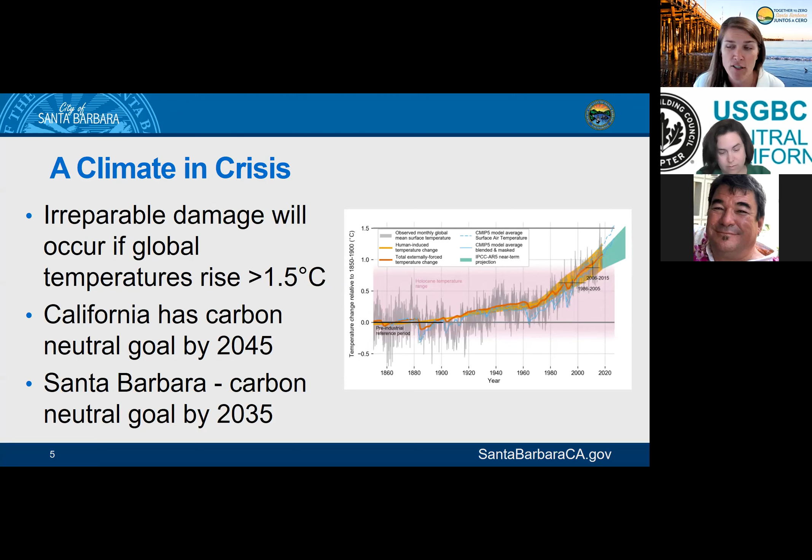As everyone on this call is likely aware, we have significant climate change happening. And in California, we have a carbon neutrality goal by 2045, and our council decided that was not fast enough and they wanted to go even faster. So they've set their goal by 2035. We're already seeing local climate change impacts in Santa Barbara. We have our increased fire season, prolonged droughts, which we're entering into another one now.

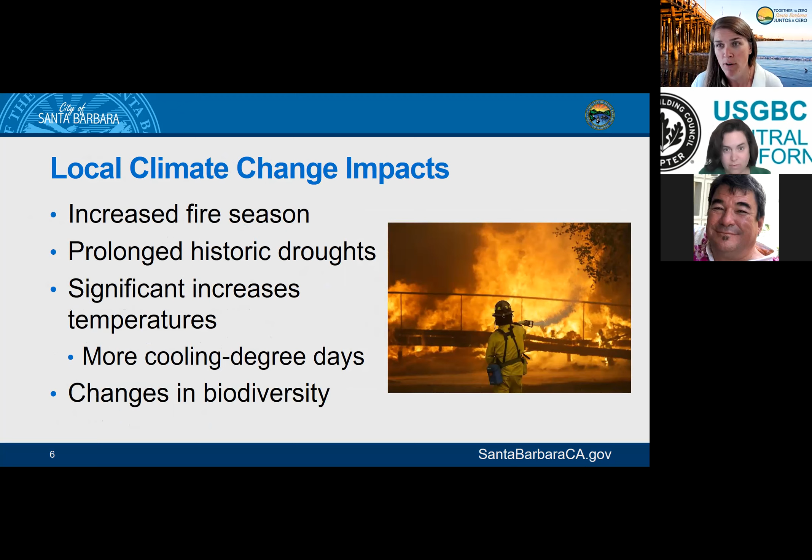Significant temperature increases. In fact, Ventura and Santa Barbara counties have seen the highest rise in temperature in the country over the last 100 years. And even changes to our biodiversity. So this is a big issue and one that we're taking very seriously.

And so in order to meet that carbon neutrality goal, we have to look at where our emissions are coming from. And in Santa Barbara, we have two main sources of emissions and a small third. The largest for all of us is transportation at almost 60%. And then energy comes in at almost 40%.

And in California, building energy use accounts for about 25% of emissions, but in Santa Barbara, it's closer to 40% because we don't have other heavy industry, et cetera. We just use energy in buildings. So that creates a really big opportunity for us. And our energy use in buildings is split almost evenly between natural gas and electricity.

One thing I should mention, I can't remember if I have a slide on this, is we are establishing what's called a community choice energy entity, which is sort of taking California by storm, where we are taking over the procurement of electricity from Southern California Edison. And our council has committed to opting everyone in at a 100% carbon-free electrical portfolio.

What that means is that this electricity portion becomes carbon-free essentially overnight as those contracts take place. And that leaves this huge opportunity of transitioning this natural gas portion towards electricity and being carbon-free as well.

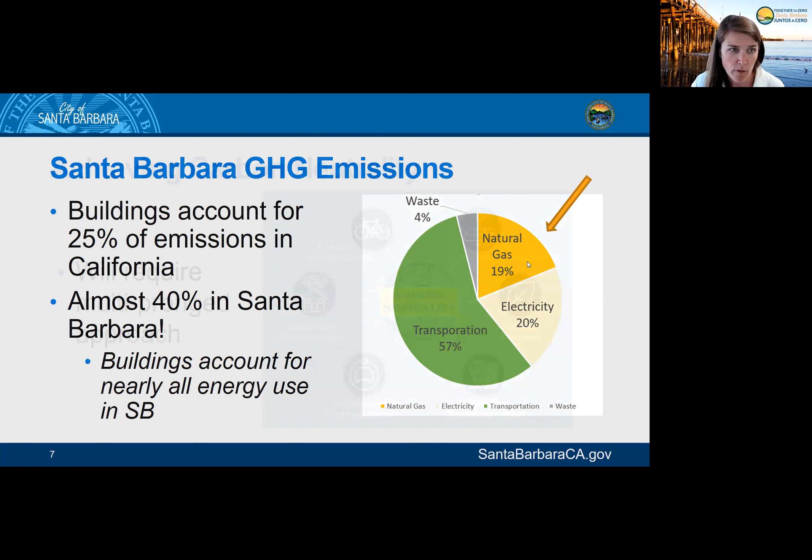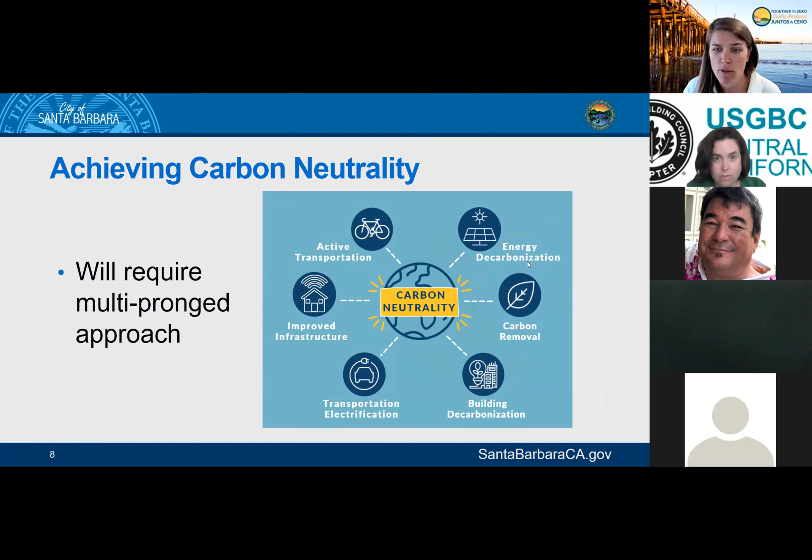So achieving carbon neutrality, there's no one silver bullet. We understand we're gonna have to have a mix of activities that get us there. But one of our big opportunities and what we're talking about today is building decarbonization. Because as we just saw, it's got a big impact and it provides a pathway towards carbon-free electrical use.

So as I mentioned, buildings are a significant source of emissions, and especially because they're long-term assets. So when you build a building, you're locking in not only that infrastructure for decades to come, but the associated emissions of each of those buildings.

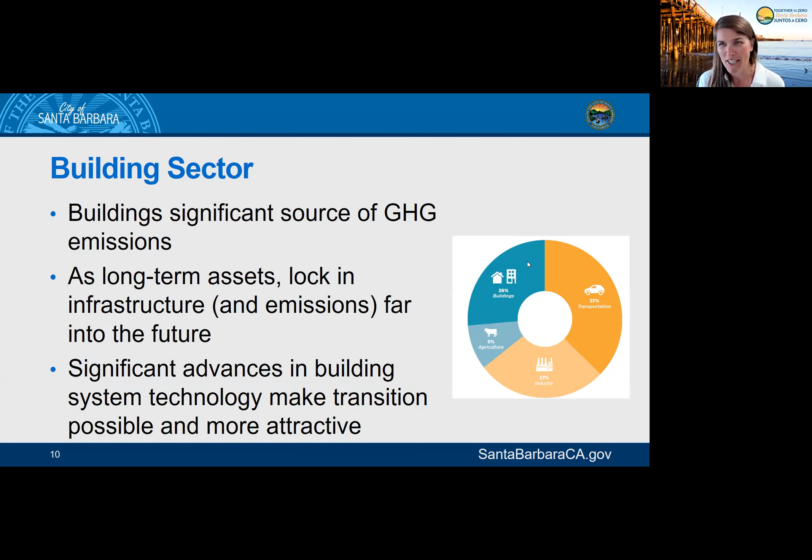Plus, significant advances in technology make this transition not only possible, but attractive. We have new appliances that I'll go over in a moment that make this significantly better than the gold medallion buildings of the 80s that everyone likes to point back to as a failure of electric buildings.

As I mentioned, we are currently, as a state, decarbonizing electricity, and in Santa Barbara much more rapidly with the implementation of Santa Barbara Clean Energy. And so this chart just shows you, if you were to transition to an all-electric building today, you would realize a 45% savings on greenhouse gas emissions. But as that mix becomes more and more carbon-free electricity, you can almost completely eliminate the GHG emissions.

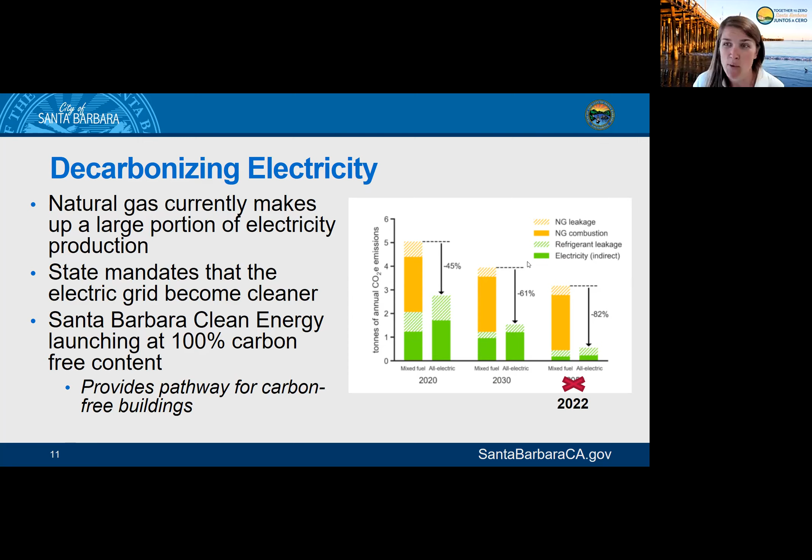Why I say almost is the refrigerants that are related to a lot of electrical equipment still produce some emissions that we haven't figured out how to eliminate yet. So you can see in Santa Barbara, we're meeting that much sooner than 2050. We'll be there in 2022 as we finish out our implementation of Santa Barbara Clean Energy.

The gas company has been very active in the renewable natural gas space, where they're converting biogas and other methane sources into natural gas for the pipeline. And they're sort of touting this as their response to emissions reductions. This is a great avenue for a lot of our harder to reach or harder to solve applications. But in terms of building energy use, there's just not enough supply of biogas available to create the RNG needed.

So it's, again, a really, really good application for like freight or heavy industry that are harder to electrify because of the load size, but not so much for our small residential or commercial use. Also, it does not solve for pipeline leakage, which is one of the significant sources of greenhouse gas emissions related to the natural gas pipeline.

They're also looking at blending in some hydrogen into the pipeline, which is also promising, but there's severe limitations on how much hydrogen you can blend into the pipeline before you need a complete overhaul of pipeline infrastructure. So about 5 to 15% hydrogen can be blended in before the pipeline itself needs to be replaced. And a full transition to hydrogen would actually require not only the pipeline replacement, but also appliance replacements in your home. So it's not the solution to the natural gas problem.

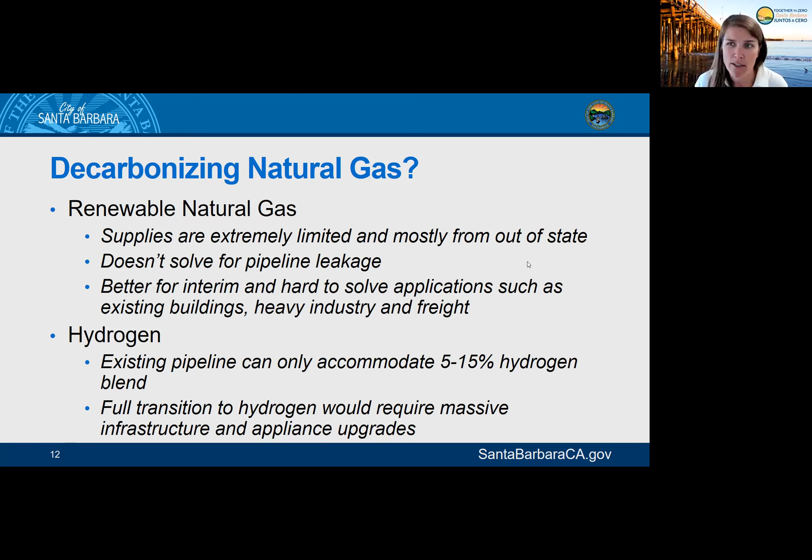So what is our opportunity? Well, as many of you probably know, local jurisdictions can implement what are called reach codes or stretch codes or building code amendments, where we are able to adopt something that is more stringent than the Title 24 Energy Code requirements. We are allowed to allow for exemptions based on our local building stock and our political will.

And there is a requirement that these reach codes must be cost effective. You cannot be implementing something that creates a cost burden on the consumer. And this is why we're focusing on new construction, and I'll go into that in a little bit.

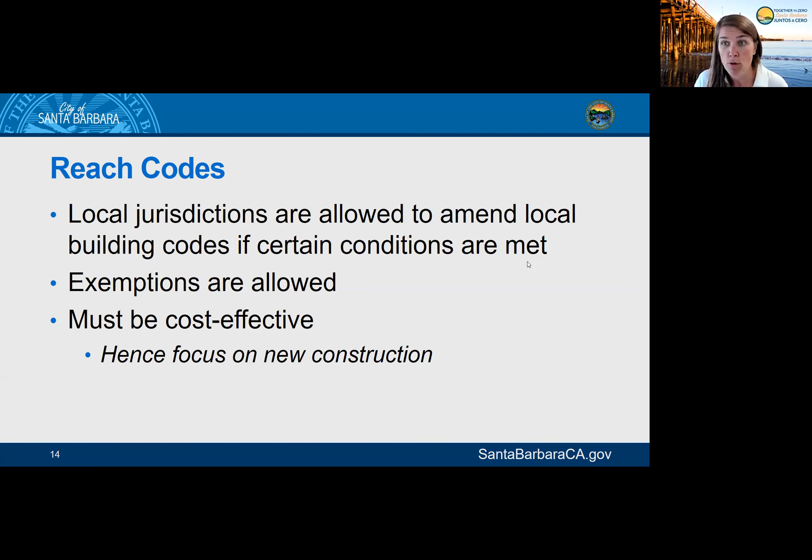So the impact of reach codes, especially because we're only looking at new construction, is a little bit nuanced, right? We're not going back to our big opportunity, which is all of our existing building stock, because it's not cost effective. But in new construction, it is. And so you see over time, you have kind of a slow adoption as you're creating the market transition, and you're sending the market signal to the industry to start developing these technologies and making them prime time to allow for the existing building adoption, which is a steeper slope here on the right side of the graph. So we're basically preparing the market for the big opportunity, which is existing buildings.

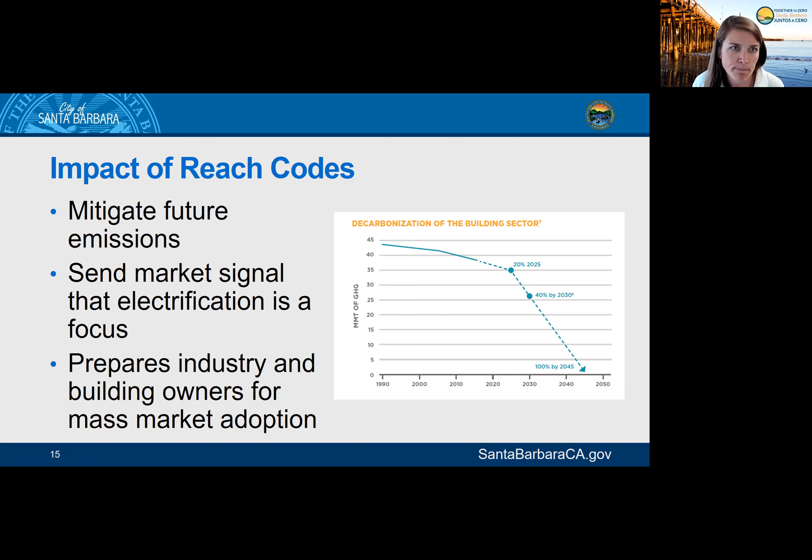So cost effectiveness: the reason why new construction is cost effective is because you're not installing the gas infrastructure from the main in the street to the building and then up through the building. You're only doing the electric service. Additionally, new construction would not require a panel upgrade, which can be very costly, because you're designing it appropriately in the first place. Additionally, there are appliance efficiencies when you go to all electric, especially as more and more homes require air conditioning, especially where you all are located, because air source heat pumps can provide both air conditioning and heating. And so you're only buying one appliance instead of two.

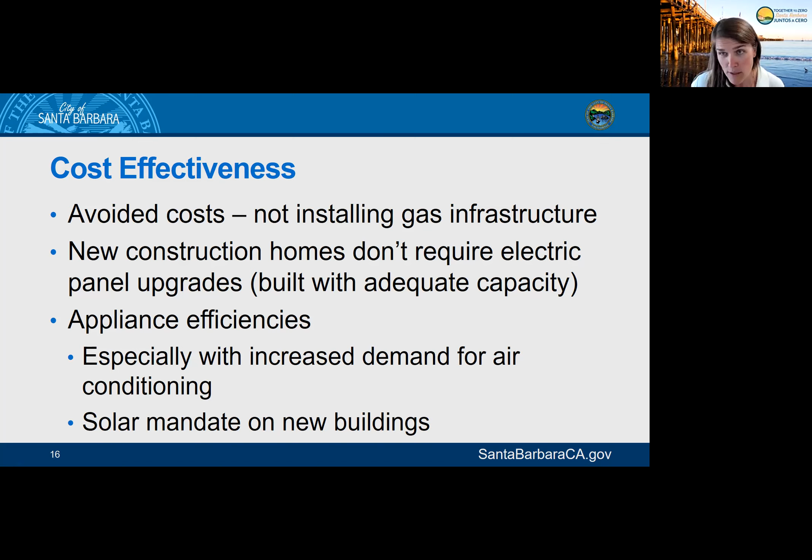Additionally, there's a solar mandate on California residential new construction that requires the entire electrical load of a mixed fuel building to be covered by solar, which is about 50% of the electrical load of an all-electric building. And so you're already gaining a significant amount of efficiency there by being able to produce half of the power you need on site, which is really sort of an innovative approach to cost effectiveness. And so you're able to not only produce that power, but in some cases generate revenue and certainly offset costs that way.

So for existing buildings, we get this question all the time. Well, new buildings, in Santa Barbara, we literally build 20 new buildings a year. It's very infrequent. We're a fairly built out city. So why do this when the opportunity is with existing buildings? Well, existing buildings have to be different. Again, there's that cost effectiveness piece where it's much more expensive to transition an existing building because you have those infrastructure requirements, right? You have the panel upgrade generally to accommodate the new appliances. Plus, in an existing building, appliances are not generally sunsetting at the same time. And so you would inevitably be retiring appliances before their end of useful life, which creates a cost burden as well. And so instead, we're going to approach that through an incentive and an education program where we're helping people find that transition.

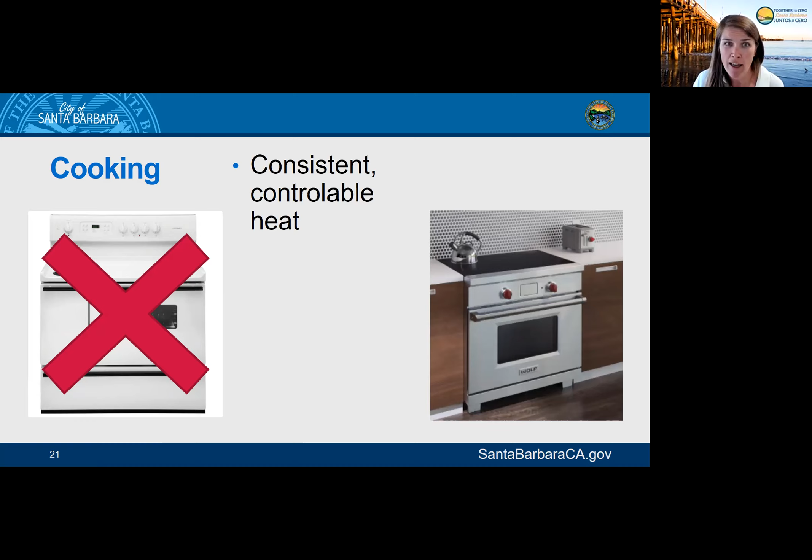Nowadays, we have induction cooktops, which are incredibly consistent and controllable. They have significantly improved air quality, and you can't burn yourself on them because they stay cool to the touch and they conduct through magnets in the surface. They're actually swiftly becoming a chef's preference because of that controllability and the fact that you can boil water at least three times the pace of a natural gas stove. And again, as you can see from this picture, all of the major manufacturers of cooking appliances are making an induction version, including the high-end versions like Viking and Wolf.

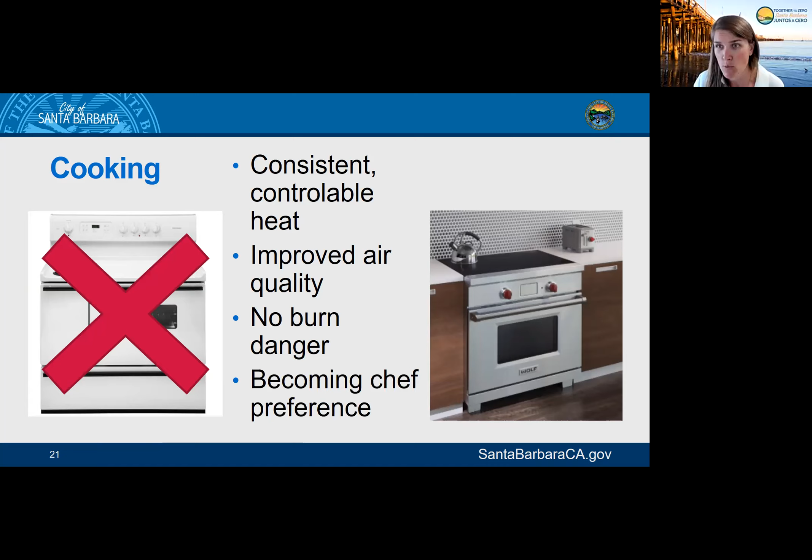And then when people, especially in California, think of electric space heating, they think of this scary thing here, this electric resistance heater that's in the wall, or baseboard resistance heating. And that is not what we're talking about today.

We're talking about air source heat pumps that have half of the unit located outside of the building and the rest inside. And they provide both heating and cooling and are about 400% more efficient than a natural gas furnace. So even though electricity costs more on a per unit scale, you are so much more efficient with the air source heat pump that you're actually realizing a cost savings over time.

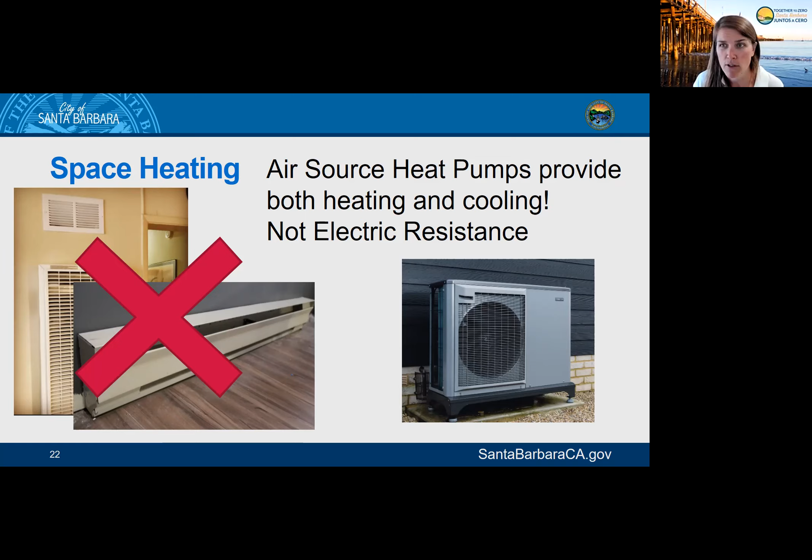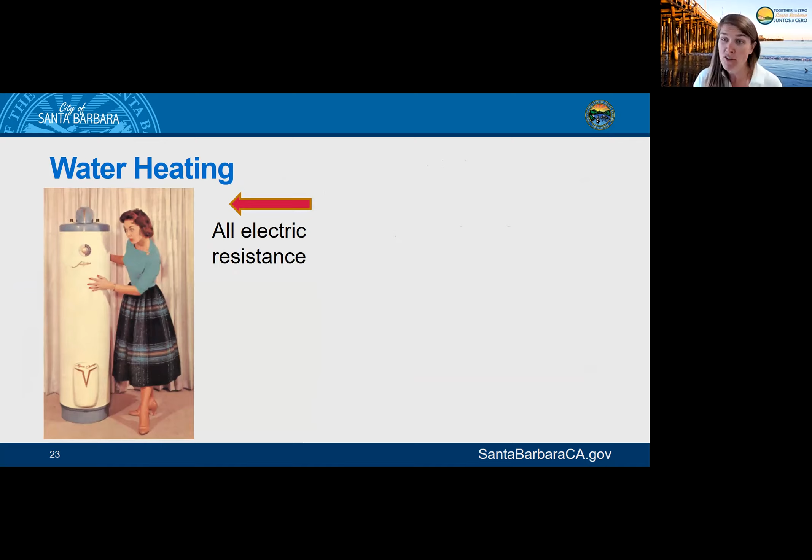Water heating, same thing. The people who are remembering those old all-electric homes are thinking of all-electric resistance, which is actually effective at heating water, but very, very expensive to do so. And so nowadays we're talking about hybrid heat pump water heaters, which are much more energy efficient, and they do come with a small amount of resistance backup for when you have high demand periods where maybe you have 5 people taking a shower in a row, or some huge laundry marathon that you're doing, and so they can kick it up a notch and give you that on-demand hot water heating.

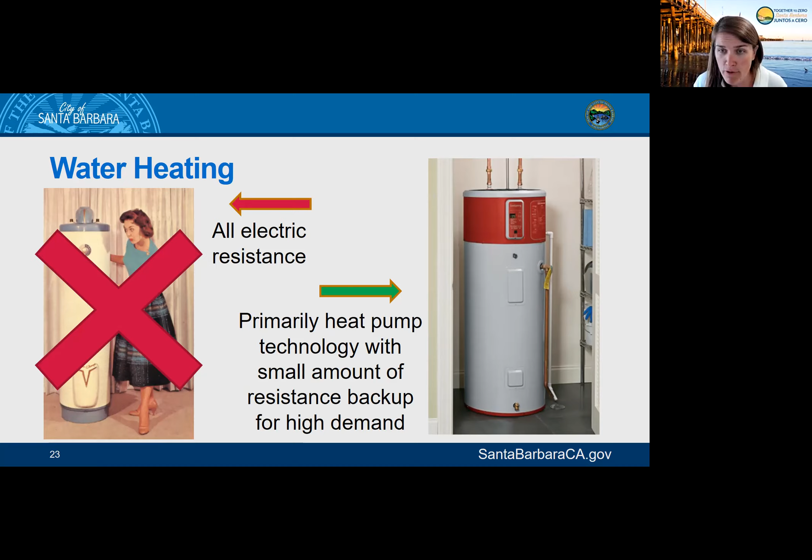And the nice thing about these is that they're inherently energy storage devices. So if the power were to go out, these would store hot water for a significant amount of time, which could be used throughout your home.

And then this one's a tricky one. Electric fireplaces, it's still a transitional technology, and I'm not going to pretend that even the upgraded version I'm about to show you is good enough, but it's better than it used to be. And so when we think of electric fireplaces, we think of this sort of cheesy one up to the left here that has the plastic logs and the faux lighting behind it.

And it is pretty amazing the advances that have happened in the electric fireplace space, where now they're using actual video footage and holograms and real sounds to create a slightly more realistic experience. But I will admit that there is room to improve on these still.

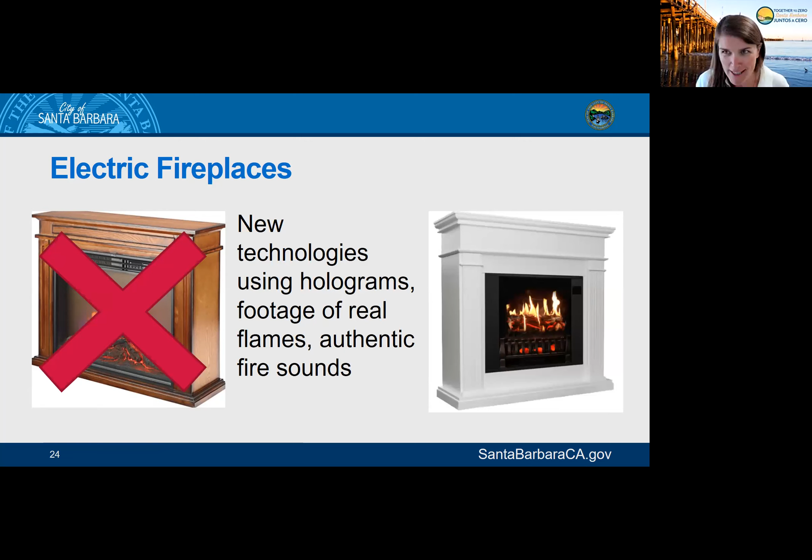So comparing efficiency, because all the time people say, but electricity is so much more expensive than natural gas, my bill is going to skyrocket. And that is true. Electricity per kilowatt hour is more expensive. But you're using so much less energy with these appliances that it works out.

So for example, when we are comparing a standard natural gas furnace to an air source heat pump, you can see from this chart that BTU by BTU, they cost the same. And so that is really important to keep in mind as you're going through these design iterations and figuring out the cost effectiveness.

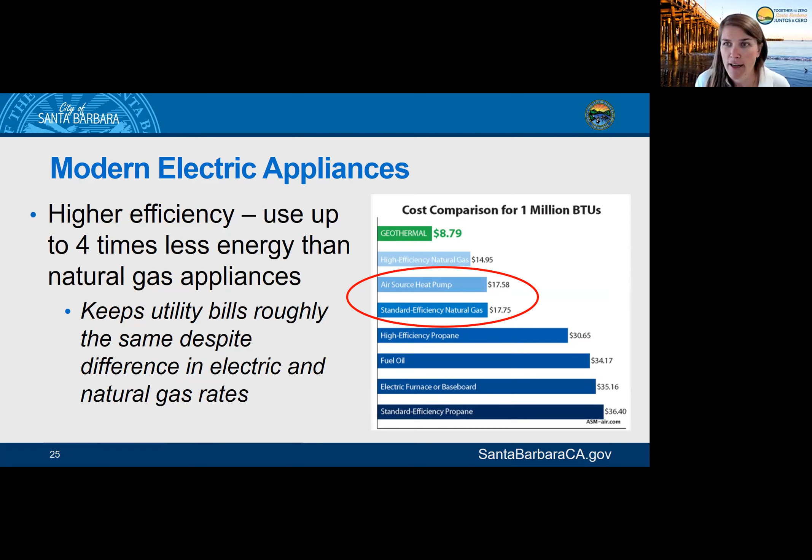Some folks have asked us if it's too soon, especially since in our area, we're subject to public safety power shutoffs related to wildfires and winds, or even grid reliability challenges. And they really question whether our grid can handle this.

And it comes as a surprise to a lot of people that 25% of US homes are actually already electric. And that number has significantly risen over the last decade, where more and more folks are transitioning off of propane, natural gas, and heating oil. And so that's really promising.

And additionally, and I think this is a really important benchmark when we talk about affordability and grid reliability, affordable housing projects around the country, including the 2 largest affordable housing developers in California, are successfully building all electric construction cost effectively. And so I think that's a big testament to how this movement is going.

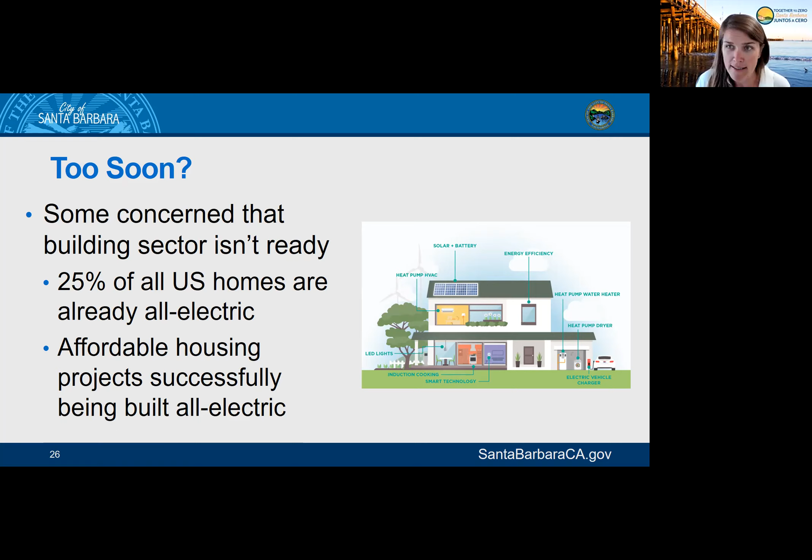And so the grid in Santa Barbara, we're very concerned about our grid and whether it can accept all this additional load. And so it's important to remember that at least here, and this might be a little bit different for where you're located if there's more cooling load, here our system is very much summer peaking. Actually, that would be the same for you, because that is when the cooling load is heavy.

And so the all electric construction would actually shift the demand increase to winter when there's the space heating and water heating requirements. And so the grid is built to that summer peaking capacity, and therefore there's a lot of room, and it actually helps grid reliability to flatten that out throughout the year.

Additionally, as I mentioned, community choice energy or aggregators are coming around, and they're standardizing on carbon-free energy, and they're building the assets, the generators throughout the state to supply additional carbon-free and renewable content. And so it's actually enhancing the grid reliability. And here in Santa Barbara, we're heavily focused on bolstering our local energy assurance efforts by building those assets ourselves to back up the grid.

Also, the grid of tomorrow is smart. We're already seeing this starting to take shape, where the grid is dynamic and it's using your building or your vehicle or your business as a virtual power plant. And so it's able to use all of these smart systems together to flatten the grid load profile.

And it is also important to note that when the power does go out, most modern gas appliances won't work without electricity. They need it for their ignition, and they need it for exhaust of indoor air pollutants. And so it's really important to keep that in mind when people say, well, what if the power went out? Your gas stove is probably the exception, that you could light it with a match, but then you would not be ventilating. And so that would be a concern.

Additionally, if there's a system-wide outage, like a transmission line outage for electricity, it's much faster to reinstate than if there's a pipeline outage in the natural gas system. So it's weeks versus months. In fact, there's pipelines in the natural gas system for SoCalGas that have been out for over a year. And so in terms of larger scale of infrastructure, it's much easier to reinstate.

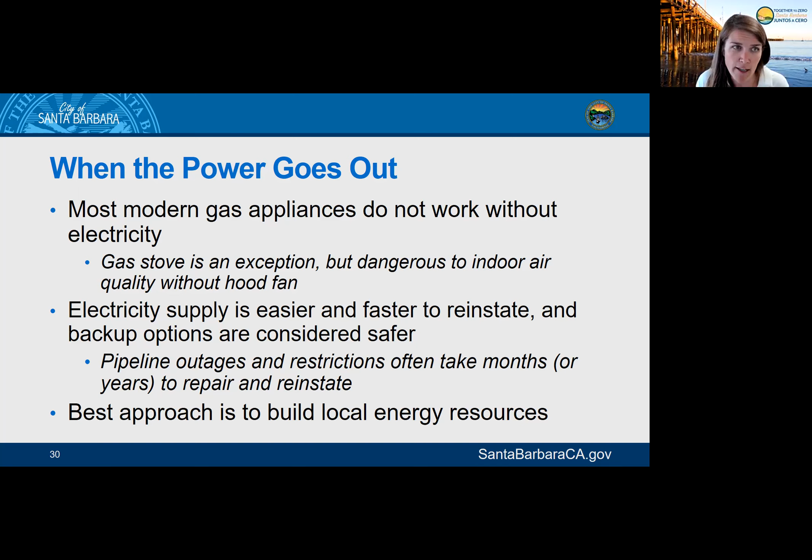And really, our opinion is the best approach is to transition off of the natural gas system and build as many renewable generation assets and storage as we can here locally. And so resilience, again, all of these pieces about grid reliability build up to resilience. And we think that we can better improve resilience here by focusing on energy efficiency and making buildings as energy efficient as possible, and then plugging them into the local energy supply with innovative technologies and battery storage.

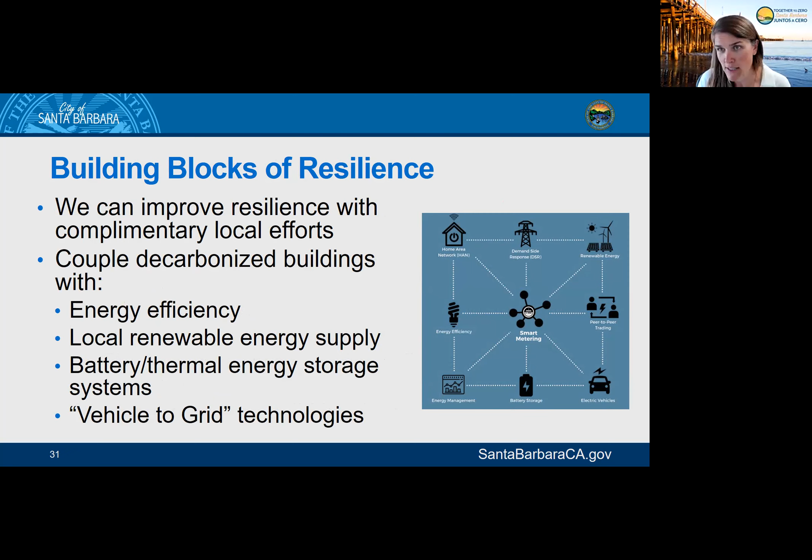There are some ancillary benefits to transitioning away from natural gas, and one is avoiding investment into a carbon-intensive system. In fact, in areas where there are dual fuel utilities like PG&E, where it controls electrical and natural gas, they're very much in support of a transition to all electric because they see the diminishing need for the natural gas system, and they'd rather not keep investing in it and focus on the electrical side.

There are also some significant public health improvements. In fact, several recent studies found that there's a 42% increased chance of asthma in children in homes with indoor natural gas use. So that's significant. Of course, there's the reduced impacts of climate change and all of the adaptation that we're having to do related to that. And there's a benefit in terms of transitioning green jobs and creating solar jobs, wind jobs, battery storage jobs, etc. So there's some economic development opportunity there.

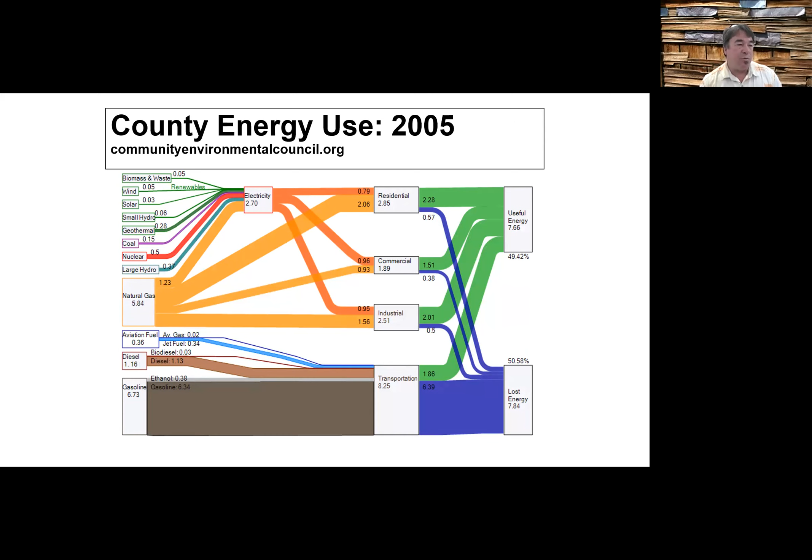And they envisioned where they wanted to go by the year 2030 by making the renewable energy portion of the portfolio for our county more robust, to pick up most of the building sector loads, and also to pick up some of the transportation loads through electric vehicles. So this is the direction we're headed to now.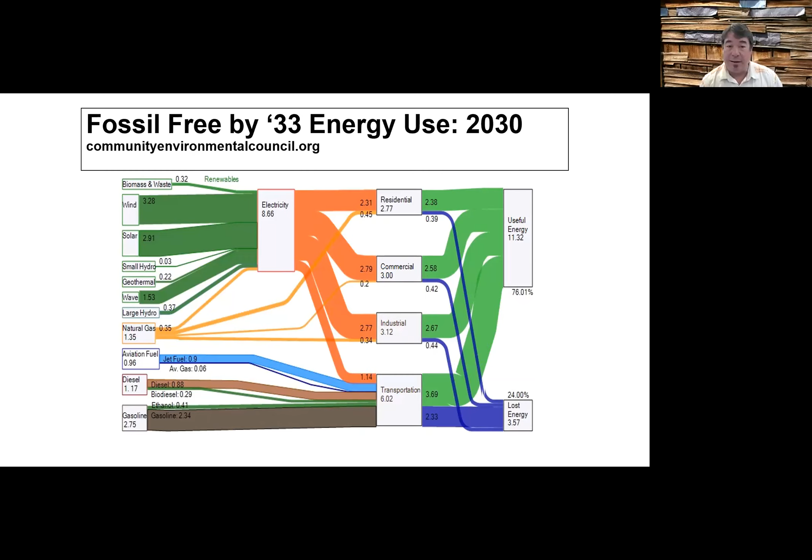It's the year 2021, and we haven't quite got the building sector electrified enough. And so we're really focusing on trying to do that so that we can make a big difference for climate change. We really see this as the future. AIA California has been advocating to eliminate fossil fuels from the building sector. There's 42 jurisdictions in the state that have adopted electrification goals.

And here on the Central Coast, the city of Santa Barbara, San Luis, Ojai, and soon to be Carpinteria and Goleta are moving forward to adopt an electrification goal by the year 2035. So San Luis and Ojai have already adopted that goal, but we're trying to get all the cities here in alignment to try to, for new construction, get them to electrify their buildings.

So let me show you this little project we did. It's a little bit over 9,000 square feet. It's a 2-story building for the U.S. Forest Service. It was surprisingly leased to the Forest Service, so the development was for a private developer.

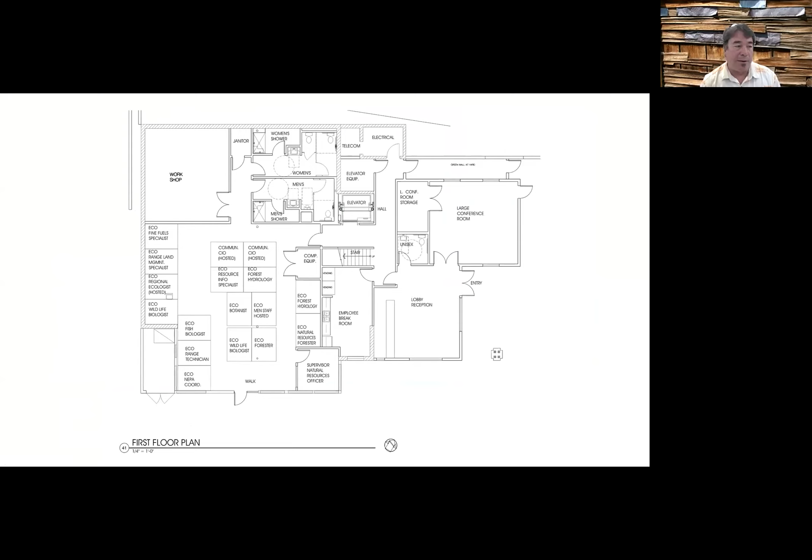Here's the lower level. It has a lobby where you'd come in and a large conference area, and then you get into kind of a big area of cubicles and little breakout rooms, men's and women's shower, because these folks go back into the backcountry and inspect the forest and look for wildlife. They have a workshop where they have chainsaws and maps and things stored in there. And then the upper level, some administrative offices and a bunch of other cubicles and individual rooms for things.

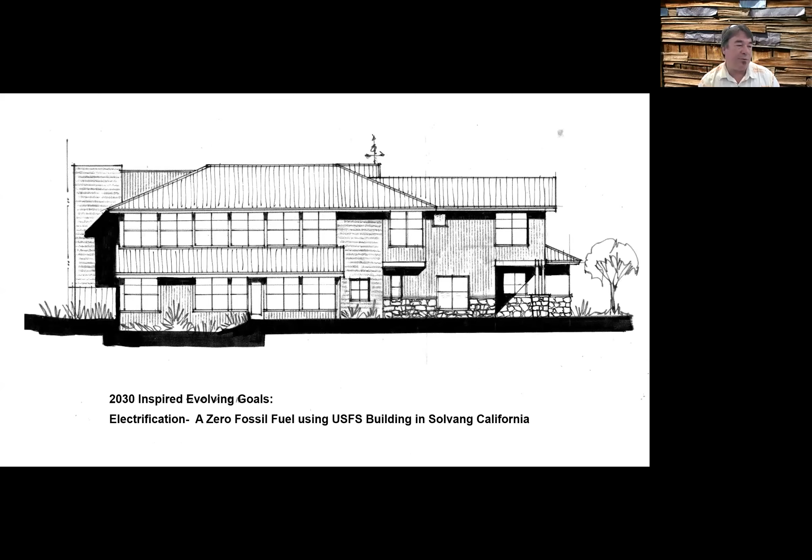And this is the exterior of the building. This is the south elevation, so there's a good exposure to the sun and a lot of roofs that were facing south. And it was a remodel of an existing building. There was about maybe 6,000 square feet in this existing 2-story building that had been used for retail and office. And we did an addition to build an elevator to get ADA access to both levels.

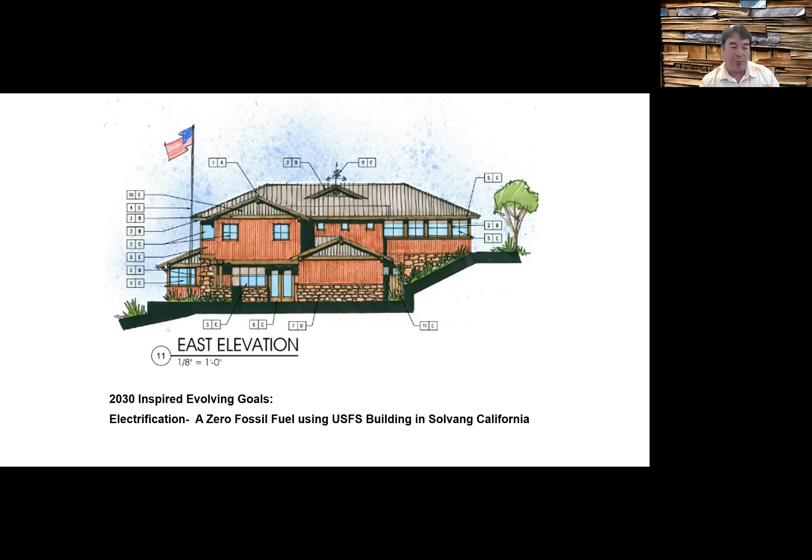And during the process, there was no gas run to the existing building. So we debated whether we would run a gas line over or go all electric and save the money for the gas main and meter setting. And we decided to go all electric on the building as the economical choice, as well as the ability to lower the operating costs once we got the whole package together. So this building became a zero fossil fuel using building in Solvang, California.

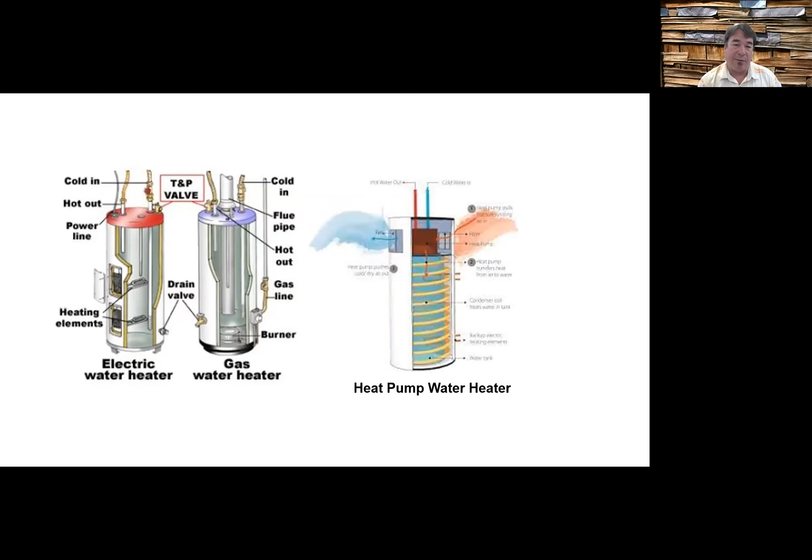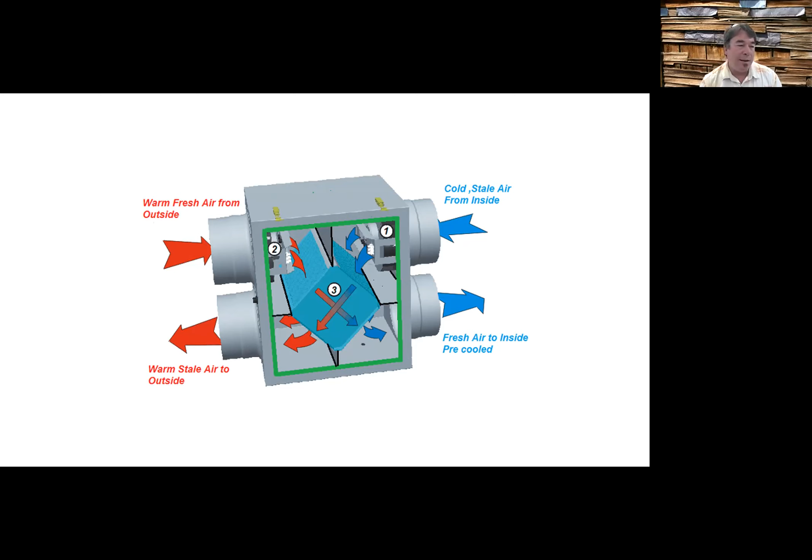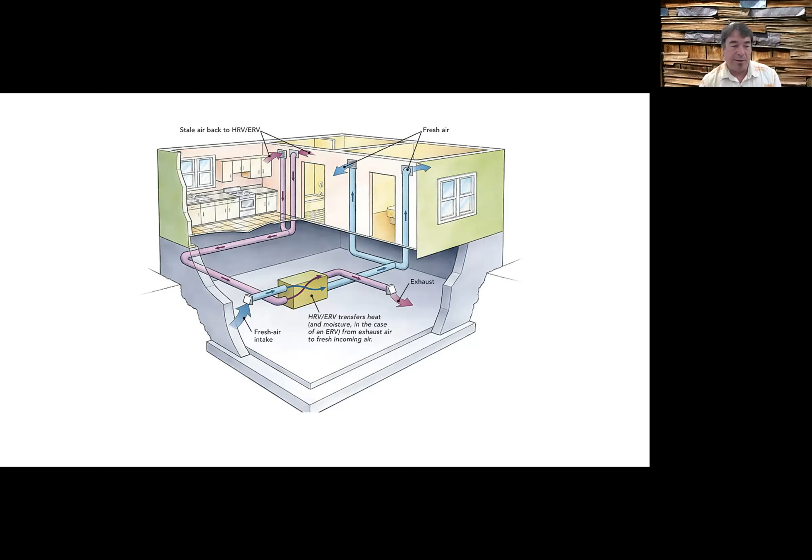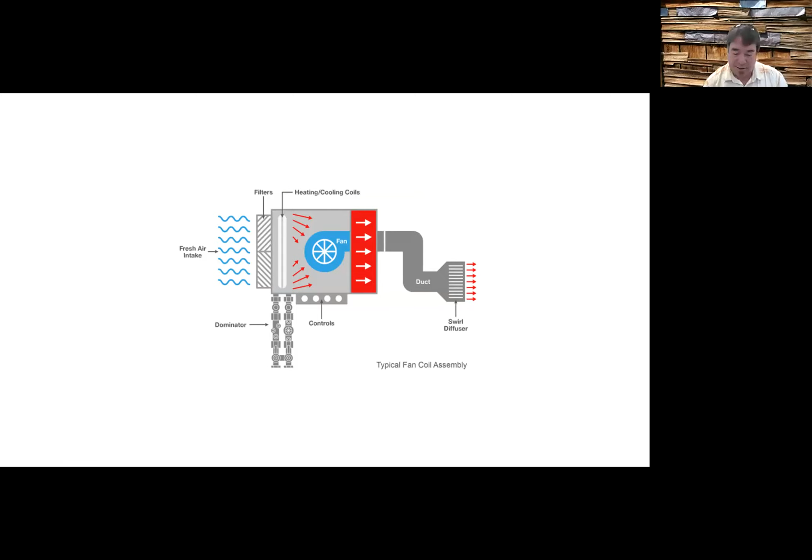So the way a fan coil works is basically it takes air in on one end, either through a return duct, or directly into the unit. It heats or cools the air depending on the demand, and then it shoots it out via a diffuser. All of these are tied to an exterior heat pump. But the unique thing about a VRF system is that it's a variable refrigerant flow. It can circulate only the minimum amount of refrigerant needed during a single heating or cooling period.

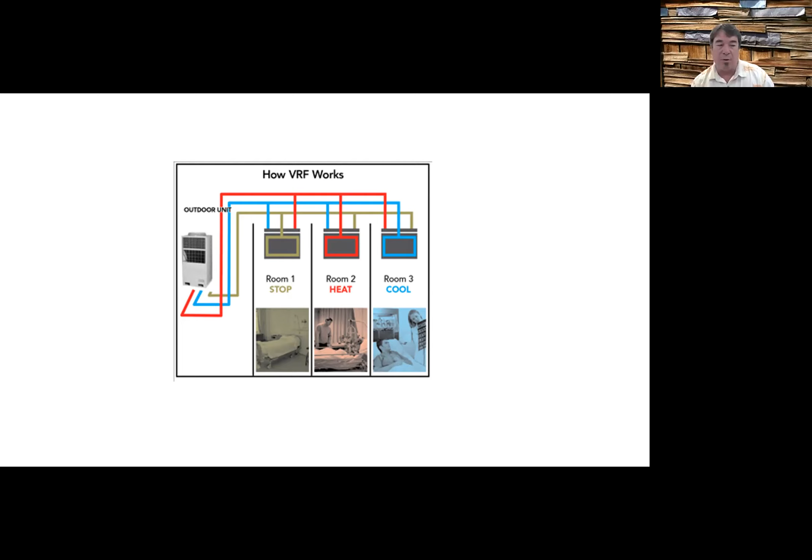So one room can be asking for cooling, another room can be asking for heating, and another room can be off. And the system adjusts on the outside to only meet the demand of the individual units on the interior. So you have higher control of temperature in various rooms. One room could be on the sunny side of the building, the other one's on the cold side, and you can address interior comfort independently.

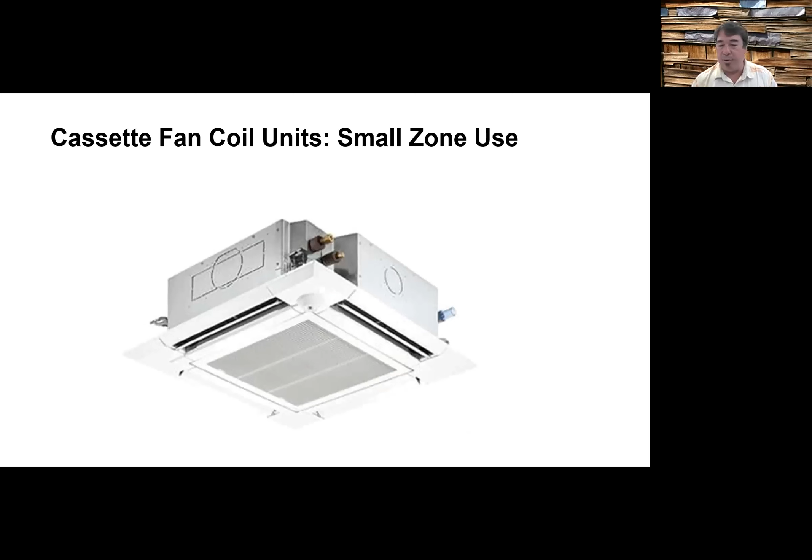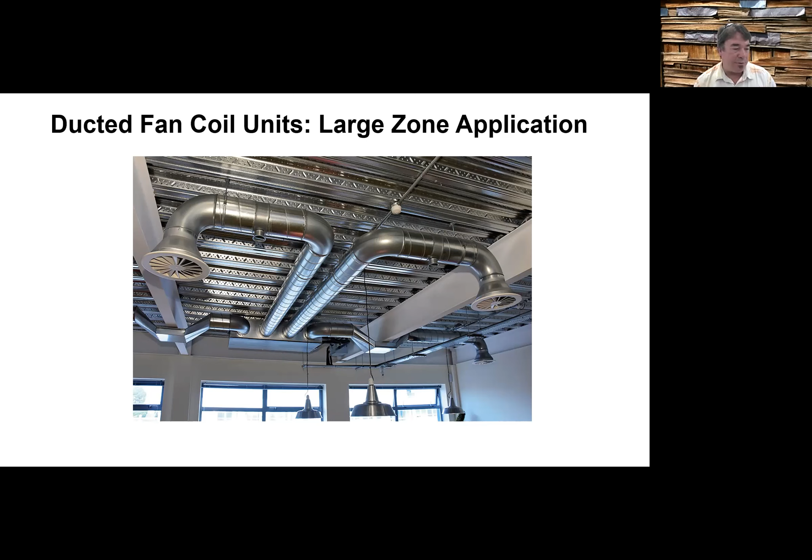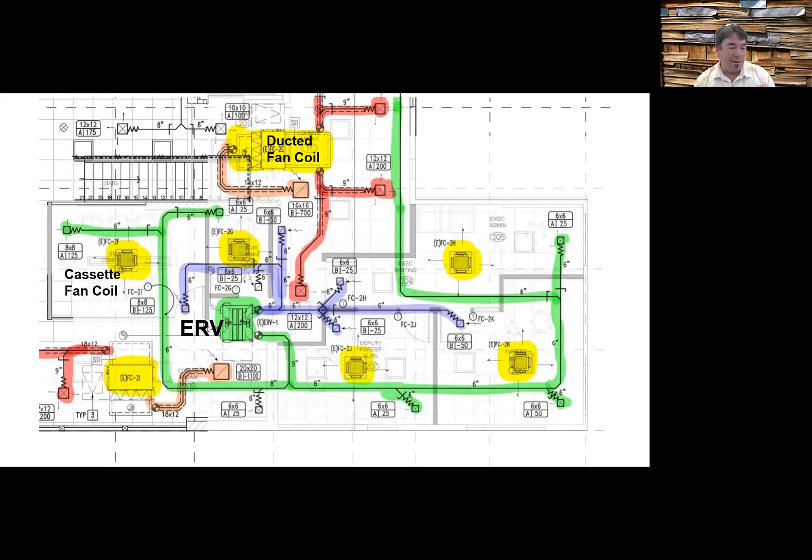Here's what one of the cassette units looks like that goes into the ceiling. In a T-bar ceiling, it takes up the space of a little bit bigger than a standard return register, but it's doing both return and supply. And this is what a ducted system would look like in a typical building where you're having a fan coil supplying the air out and returning into a different plenum. So again, here's the system with the cassette units being yellow, the ducted unit also yellow, but with the red ducting coming off of it. And then the ERV, the energy recovery ventilator, providing fresh air for all the units.

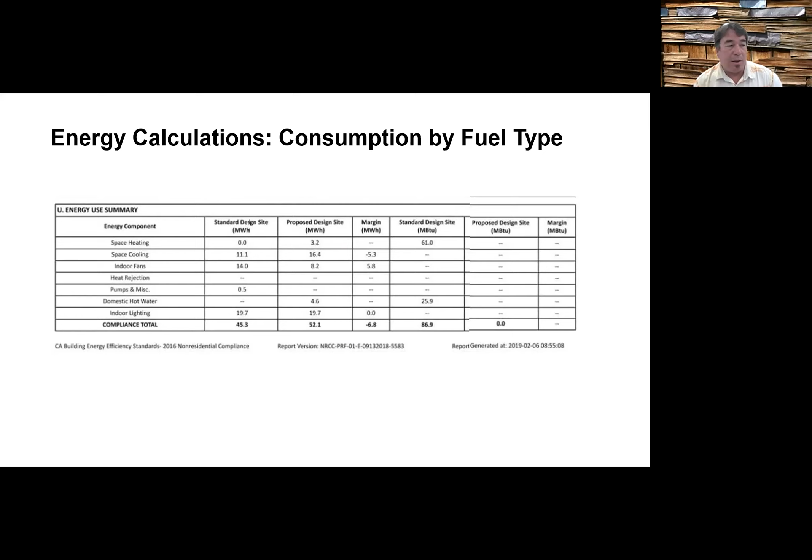So if we look at our Title 24 calculations, you can see what the standard design budget for the building was. 45 megawatt-hours was allowed. We exceeded that by going all electric with 52.1 megawatt-hours. And we had a budget of 86.9 MMBtus, but we didn't use any. So even though we went over the budget for the electrical, we were under the overall budget for PEUI for this project, projected energy use intensity.

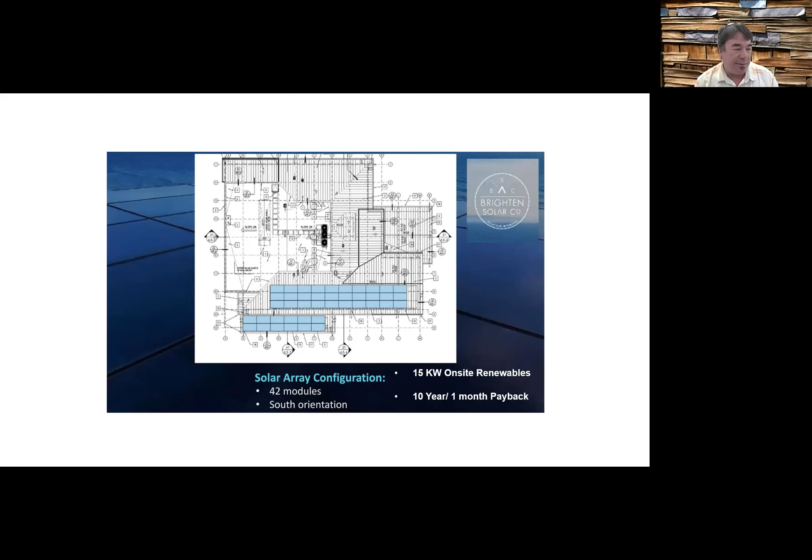So after we crushed our energy use down, we met with a solar consultant who figured out how much power we could pull off of our south-facing roofs. We added that to the equation to show how it comes out, including the solar, at 81% reduction in energy use from the baseline of 74 kBtu per square foot per year. So this project met the 2030 Commitment goal of an 80% reduction in energy use, and also was not using any fossil fuels, so it's all electric.

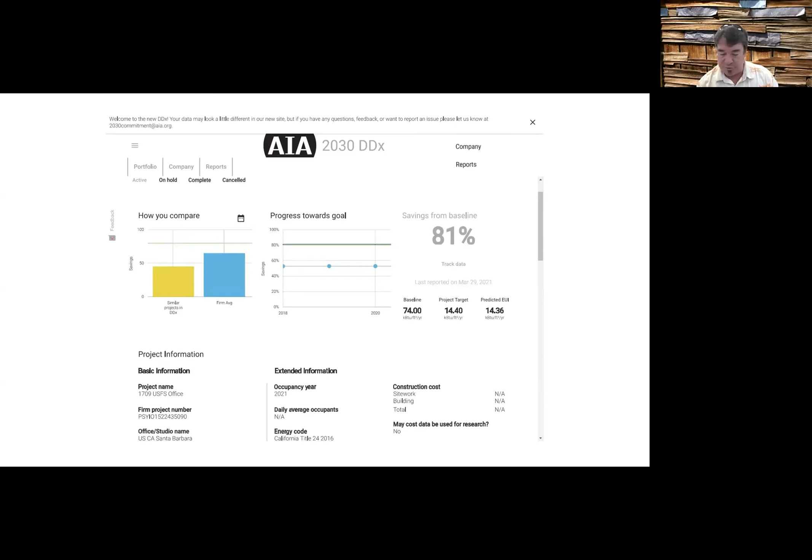This is from the 2030 Commitment. For those of you that work at offices that are doing that, you put in your portfolio data and it compiles it for the annual year, and it shows you the performance of all the buildings that you're doing that annual year, how they work together.

So let's talk about the last aspect of going all electric that we did not have in that commercial building, which is cooking. So the Sacramento Municipal Utility District did a study before and after using an induction cooktop about people's reluctance to go to one, and after they used one, how they felt. And obviously it's quite a different cooking experience. It's not like the old coil like Alelia alluded to, but it's actually pretty efficient. And Consumer Reports writes the top 10 rated cooktops in general are all induction cooktops.

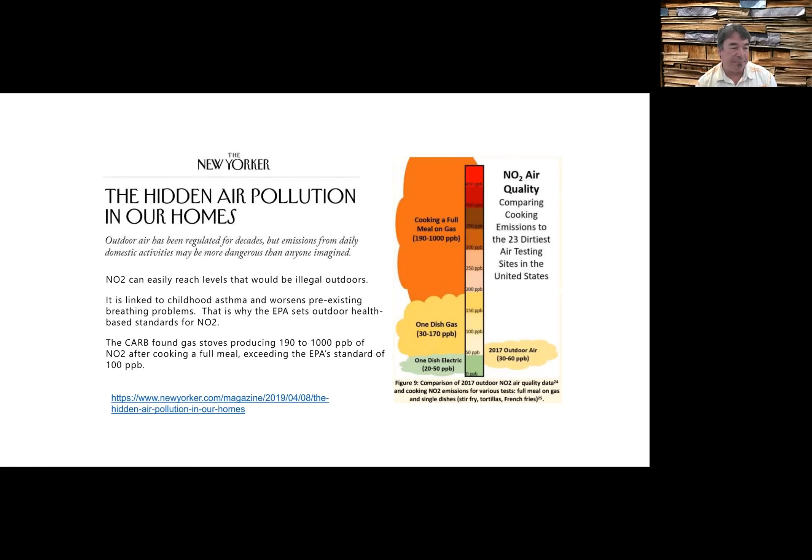And actually, McDonald's and Wendy's have all-electric prototypes that they're rolling out, because they're onto the fact that running gas utilities to their buildings might not be available in some locations, but also it's feasible for them to have a production kitchen that doesn't use fossil fuels.

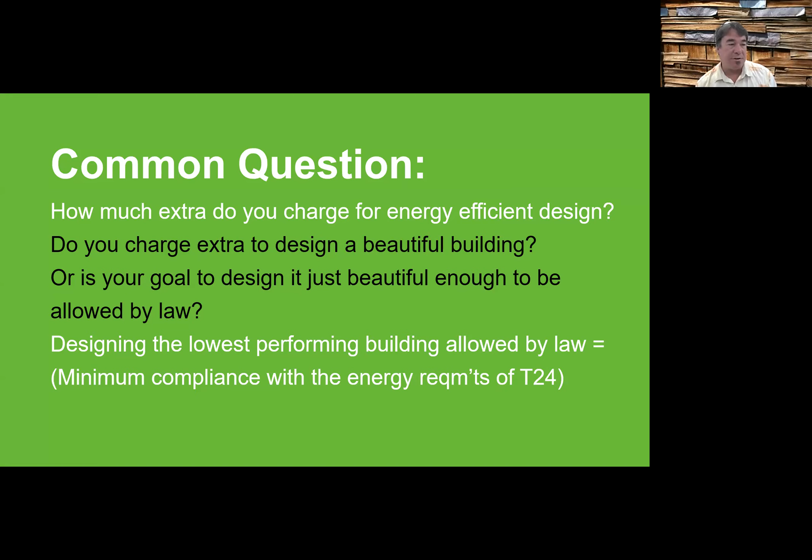So oftentimes some people ask me, how much extra do you charge to design one of these fancy energy efficient buildings? And my response is, do you charge extra to design a beautiful building? Or is your goal to design it just beautiful enough to be allowed by law? And when you're designing the lowest performing building allowed by law, really, you're just doing minimum compliance with Title 24. It's pretty easy to go above and beyond that minimal compliance margin and design a building that is using far less energy. And that's the end of my presentation.

So I think that we'll entertain questions at this point. So Laura, I'll let you direct traffic. I don't know if you want the questions to go into the chat box or. Yeah, wonderful. Thank you so much, Paul. Yeah, if you have a question, you can unmute yourself. But we're going to start with a question here in the chat.

And the first one is from Lauren. For higher density development with limited roof area per unit, how is the city working with community or group-based solar as opposed to individualized solar systems on each residence? Yeah, that's a great question. What we're trying to do currently is go through an objective design standard to at least allow for easier development of parking lot solar. That's really challenging here in Santa Barbara because of aesthetic concerns. And so we're trying to facilitate the process more than we are doing community solar.

And the reason that is the case is, A, there's just not a lot of opportunity for community solar in Santa Barbara. Like I mentioned, we're very built out. We don't have a lot of land. And because the community choice energy entity is going to be providing carbon-free electricity, we sort of see that as a better bang for your buck for those that want to go 100% carbon-free. We are trying to facilitate as much solar on the buildings as we can.